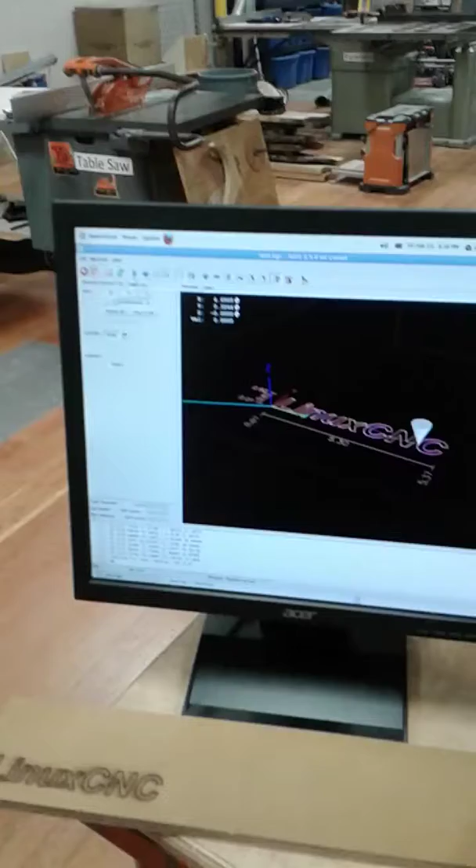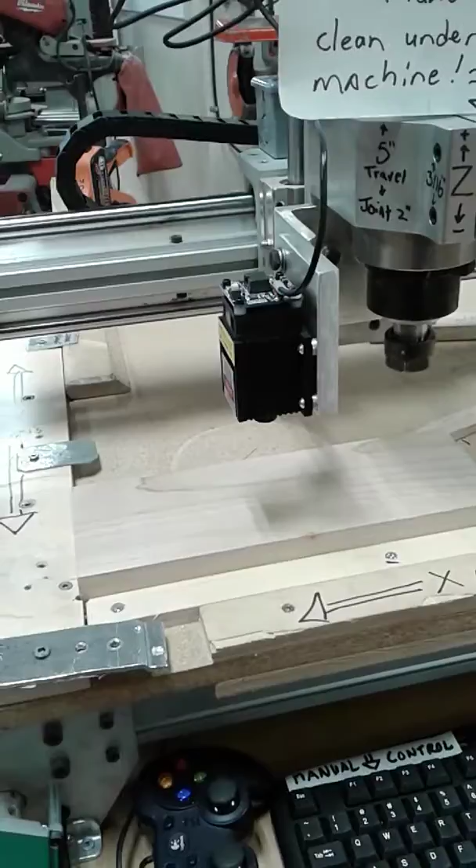Hey, it's another mad day in the DSS Big Wood Shop, and we're working with our CNC router, and we have attached a laser head for doing some laser engraving. We got this a while ago and we've been meaning to set it up, and just finally got some time today. So to make this all work, we've plugged this guy into the spindle power, the 110 power, to turn the spindle on and off.

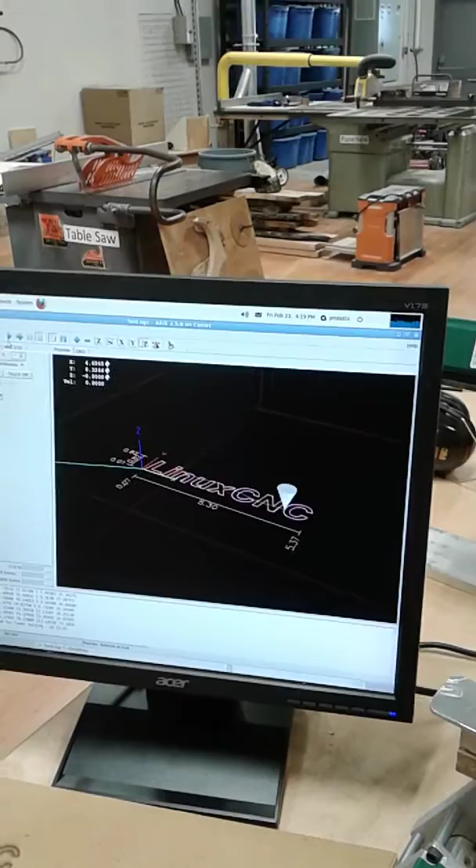We're using a cutter, and we've had to write some custom G code. So instead of doing vertical Z travels between what the file is cutting, we are just leaving the Z constant, focus the laser, and then turning the laser on and off with some custom G code. And that G code is right down there.

So this is what comes with the program from Probotix, so that's kind of fun. What I did is I just got that into a test file, and then in that test file I wrote some custom code. Right here, so we got rid of the Z travels, and there's where I turn spindle on, so turn the laser on.

And to make this work for the first time, it had to have a speed in there. I need a 0.5 second pause before it actually starts executing the G code. We found the laser, there were some gaps because there was a latency between the laser actually turning on. And then M5 is turning the laser off.

So I manually edited this file, so now we have one that works, and now we can go to our post processor, edit that, so when it spits out code, if we want to do some custom file engraving for our game machines that we're making, then the G code that's spat out with ArtCam will actually do that for the Probotix machine.

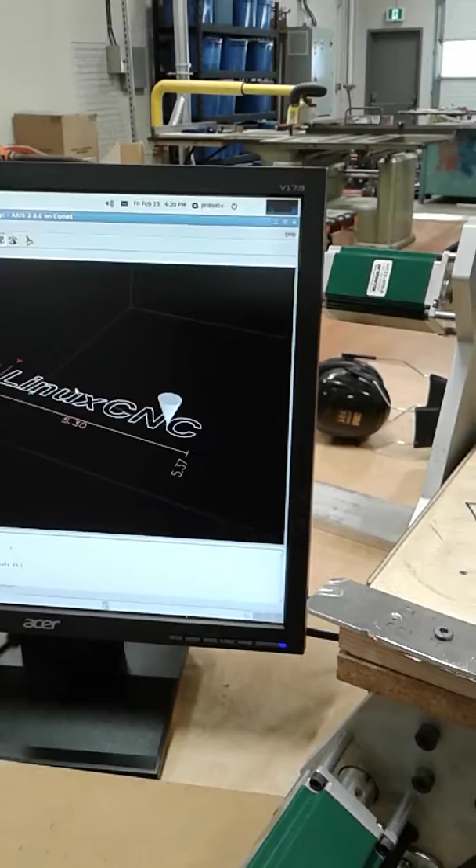Okay, so let's minimize this window and back into our Linux CNC program. I can zoom in a little bit there. And there's the code. Okay, looks like we're ready. Let's give this a go and let's see what happens.

I've got my special glasses on, my 140 to 590 nm to filter out the wavelength of light that this laser puts off. All right, here we go.

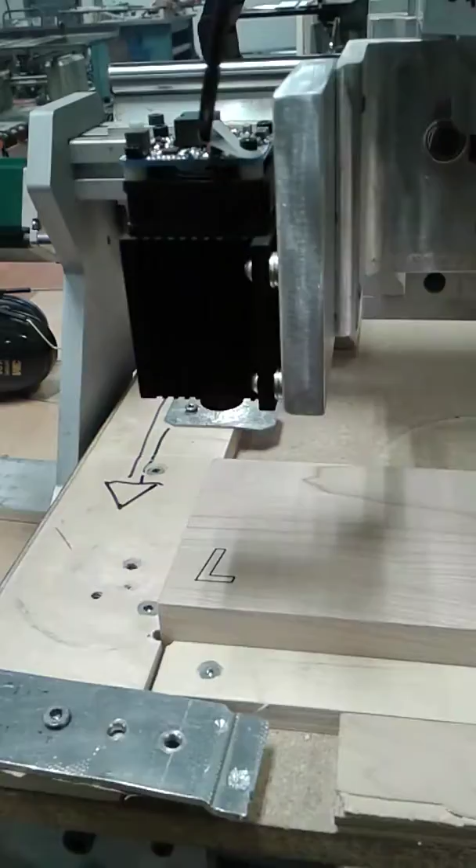Well, that's fascinating. So the video with the little tablet I'm using to take the video with, you can see all of the laser light, but my glasses filter that out, so I can't see it. I can only see what's actually hitting the wood. So that is pretty cool.

Here's the machine actually bouncing through the code.

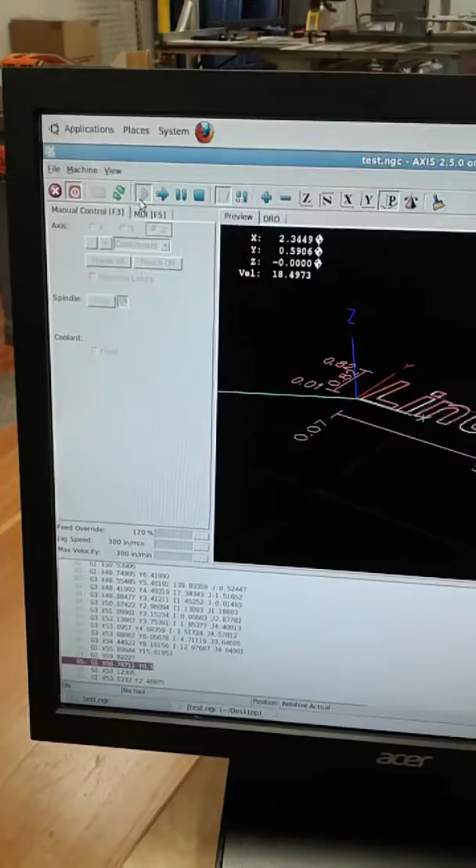I'm sure we're going to have some fine tuning to do as we start to program some files, but for the most part, the manual edit of this code that came with the machine seems to work really well. And again, that 0.5 second pause we found we needed to add, and I think it was the G04 command to accommodate for the laser actually turning on and off.

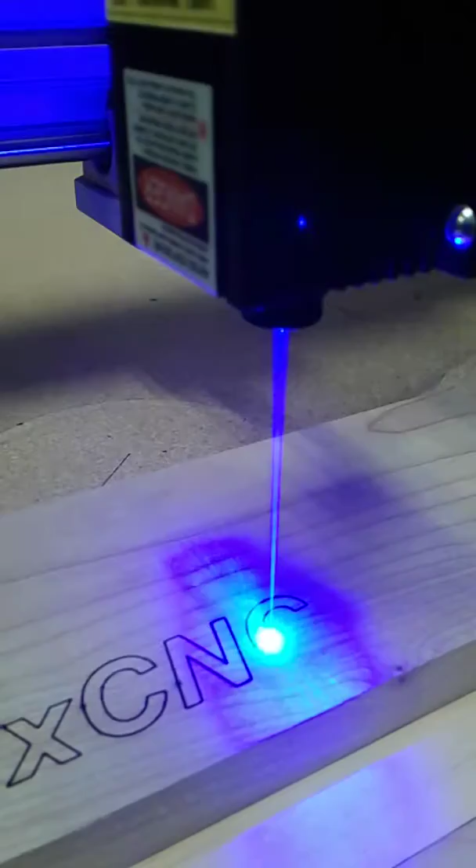Looks like I'm really close. I've actually got the tape quite a ways away, but look at that. How cool is that? Wow, look at that.

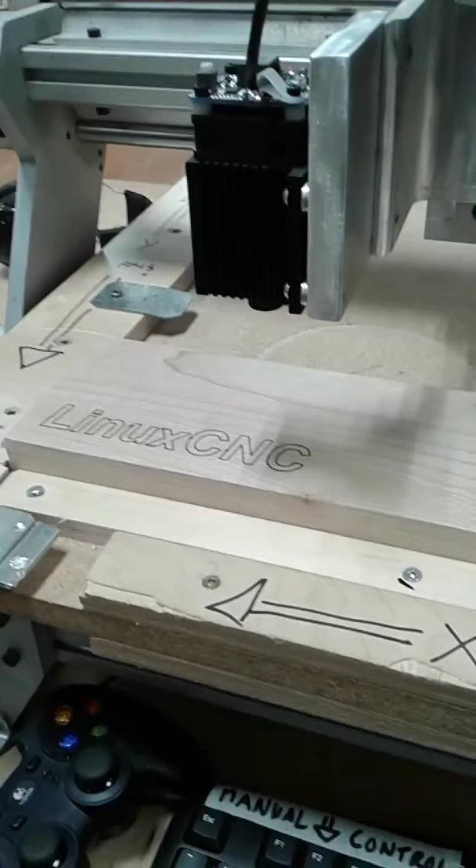Yay. So yeah, we were doing some 2x4s and they seem pretty soft, so I guess it depends on your type of wood. And down here, it is pretty deep, like it's getting down almost to a 1/16. So that's fantastic, this is really cool.

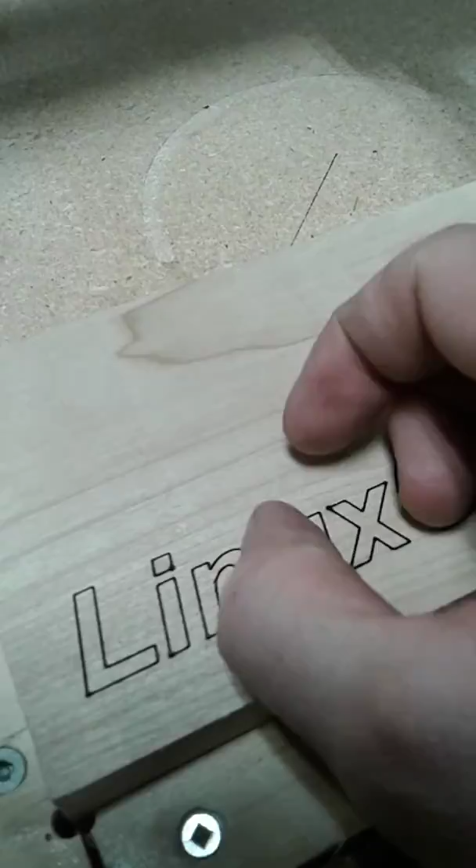So for our game machines, I wanted to do some laser engraving of the power port and the top of the board and some graphics and stuff. So this will allow us to do that. So that's pretty cool. All right.